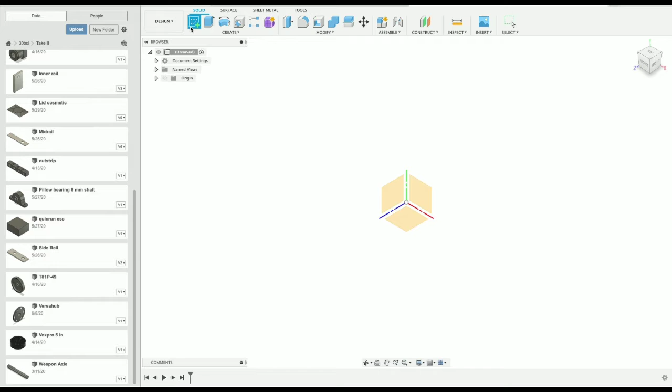Okay, so if you missed the first stream that went on for about 5 minutes, this is not my first stream for today, this is my second. So we're currently CADing a pillow block bearing for the 30-pounder. Here's the 30-pounder CAD, as it was last time. I started up the stream, started CADing this, and then the stream died - apparently someone else was doing a massive Zoom meeting or something. So currently trying to do a pillow block bearing.

So it's 127 millimeters long and 38 millimeters wide. Pop that in there. Okay, so this is about where we got last time before the stream just decided to die.

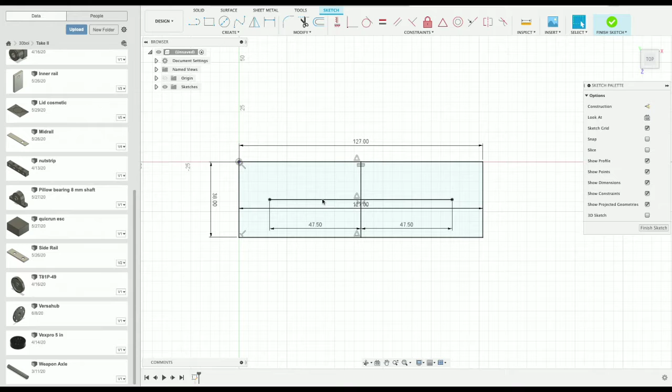Okay, so the holes are N1, which is 19 millimeters in diameter. Okay, that's cool. 19.

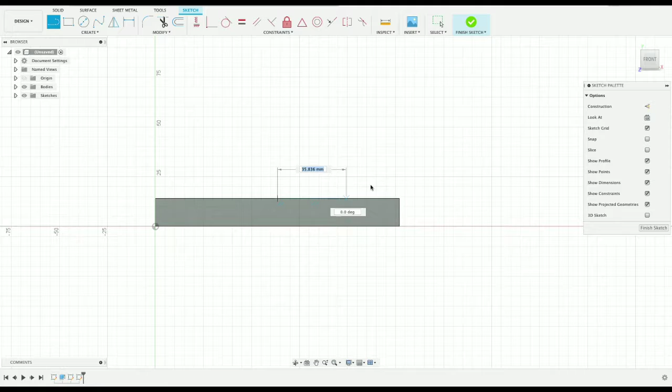It's really, really not helpful. See ya. So it looks like we've got about...

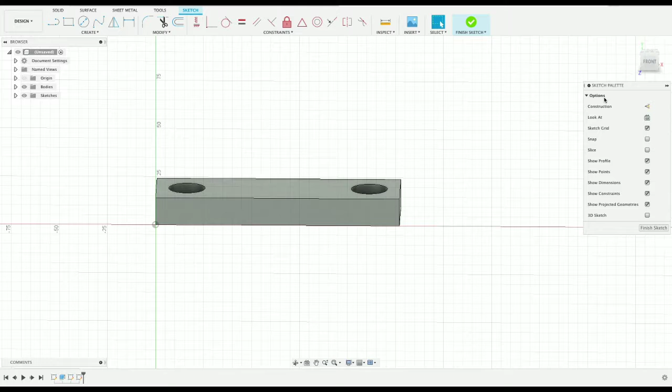So it's a 1/2 inch diameter. And it's... wait, how wide is this? Did I screw this up? 38 - no, I didn't screw it up.

So the question is, how tall is the pillow? Because there's this sort of massive dome shape, right? So the question is, where is that? So I really don't want to just - oh okay, so it's H, so I can figure out how high it is. Where's the middle? H is 30 point, oh my goodness, 1625.

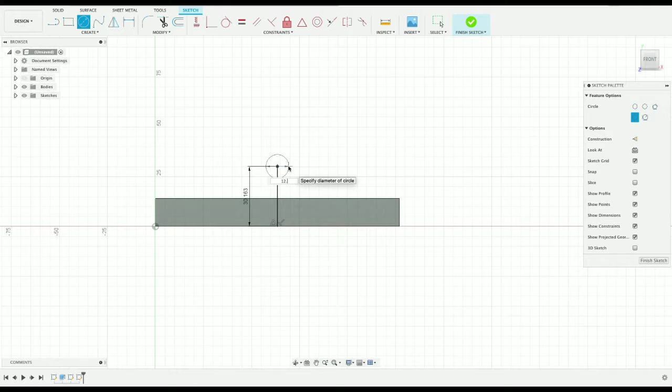30.1625. Okay, so it's a 1/2 inch, so 12.7. Something does not look right with this, and I can't figure out what. So the diameter is 12.7. That actually doesn't look too wrong.

So H0, I don't know, I can't see where H0 is supposed to go. Oh, H0 is the top thing. So it's 62 tall.

Okay, I guess that works. So now we gotta figure out how exactly this thing works.

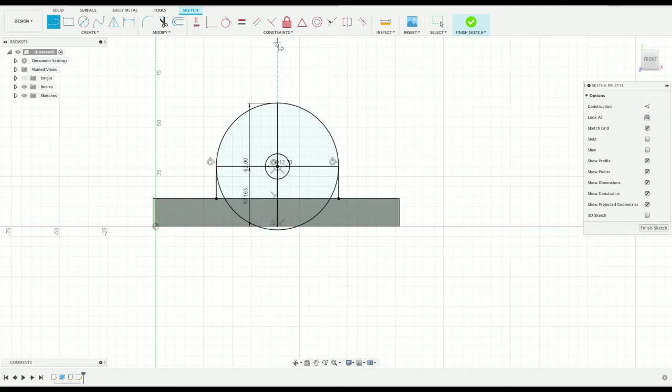I can just create a circle from here to here, and then create these tangent lines straight down. Okay, so now we can trim this sketch. Where's the trim? It's been a while since I've used trim.

What kind of combat robot am I making? I am making a... it's gonna be a lifter.

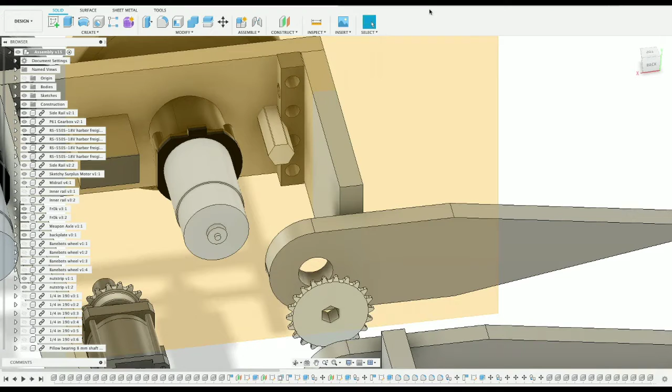Actually, here's the CAD for it so far. We're currently working on the weapon mounting system down here. We're going to be using these, I think they're called Thunder Hex axles. They're basically hex axles, so you don't have to deal with keyways and stuff. They're used, I think, for FIRST and FRC stuff. But you can also machine them on a lathe down to nice sizes, down to circles is what I'm trying to say.

I'm a little bit tired today, so if some stuff sounds kind of dumb, that's why.

Okay, that looks like a really, really small hole. Maybe it's just... I guess that's what it says, right? It says it's a 12... that's a 12.7 millimeter diameter hole. And it's 127. Yeah, this is good.

So we'll call it Pillow Block 12.7. That's what we're gonna do. Okay.

So now, I already did this for an 8mm shaft, but then decided that 8mm was gonna be stupidly small - oh, bumped the mic - so insert that into the current design. I can't make this.

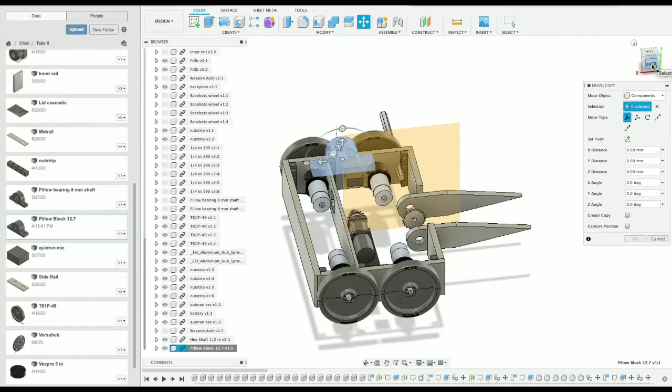Really? No, not yet, no, no. I did something wrong here. Okay, let's just compare this to the side. Yeah, okay, so that is way too big.

So the question is, what am I actually able to... why can't I show or hide? Oh, I guess I can pop down here. I don't know.

So how tall is this? 120... oh, it's 76mm. Okay, well, it looks like I'm going to need to find a different pillow block bearing, because this is 100... yeah, okay, so, yeah, it feels like this doesn't need to be this big.

Might have to just make my own. That's not exactly ideal, but at this point... stream's audio...

Hell, audio... what? Really?

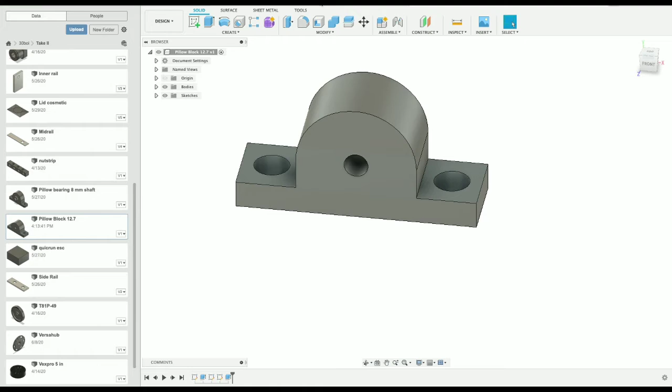Okay. And my computer's at very, very, very low battery. That's not good. Okay, we're at 2%. We almost just killed the computer. Okay, it's still working, that's good to know.

YouTube was trying to tell me that I have an audio stream bitrate of 0, which, yeah, so that's good to know.

Okay, so well, I guess let's just try and do everything else but the pillow block bearings. I'll have to just look for that, look for one that fits the description.

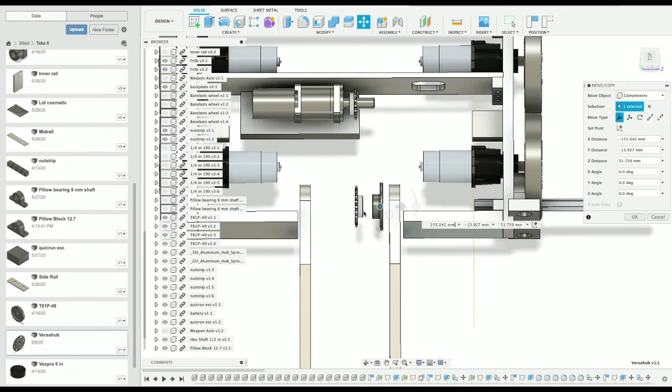I don't really know how I managed to find one that was so big and why I didn't actually check it against the size of the robot, but that's cool. Okay, we'll get rid of the pillow block bearing in a second after we put this into position. Okay, looks like it's going to be a little bit big.

But this is basically what I want. Looks like it needs to go a little bit. Yeah, there we go. I might reshape those ends. This is a featherweight? Yep, it is a featherweight. Aiming for sportsman class, just because...

Are those... oh, that's fun. The sprocket and the other thing are different sizes. So I need to see exactly which size I'm going to go with.

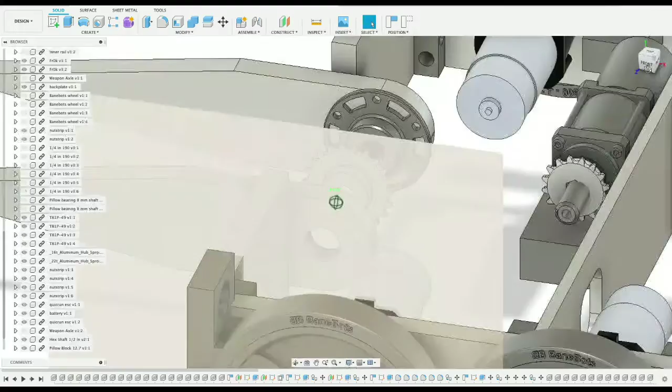Make a video comparing the best CAD software specifically for robotics - that is an option. The problem is that I have to learn all of those. I have Creo installed on my computer, both versions, for university, but from what I've done, Fusion is the best. Maybe it's not the best, but it took me 15 minutes to figure out how to pivot and rotate around an object, whereas in Creo you have to middle click, you physically have to have a mouse. So I had to go buy a wireless mouse, which kind of sucks.

But we're trying to look for the hubs. Number 25 sprockets. Oh no, did I order the wrong things? Cause I already ordered some of these parts. Huh.

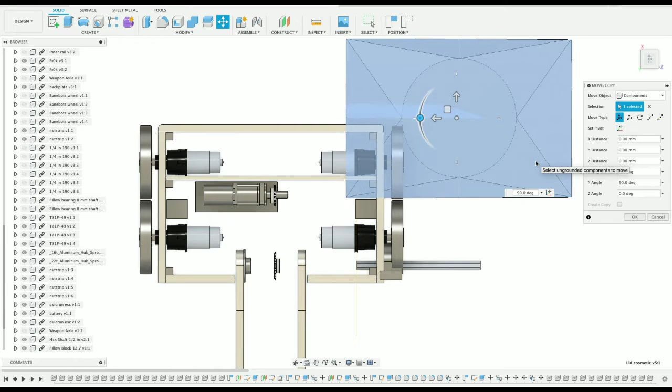Okay, well I figured that out. We can at least pop the lid on to see how that would fit. So the last real stream that actually worked - this stream's probably the best one that I've done since the second one, so okay.

Oh yeah, oh boy, that's gonna look really, really nice. So if you've missed the last couple streams, this has been an ongoing project since, oh boy, it's been a good long while.

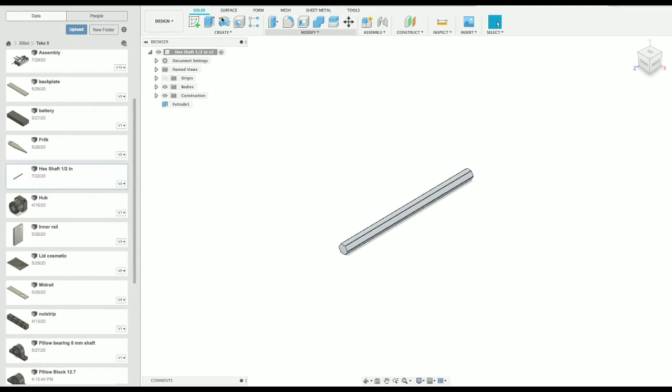Yeah, that looks good. I wonder if that plane is from the axle. Let's pop this open and see. Yep, there it is, that's why I couldn't show or hide it. There we go, we'll save that. Pop back over to the assembly, and we can get the latest, and that'll make that annoying plane go away.

Couldn't - it says I couldn't download it. That's cool, well whatever. So that's roughly what it's going to look like when all is said and done.

Oh boy, is it broken? What is it, can I? Okay, we can get rid of the pillow block. Well, we should actually probably just get rid of the pillow block. Delete it. So there's the Versahub.

Come on. Come on, Fusion. Sometimes Fusion's annoying, but it is pretty good from all things considered.

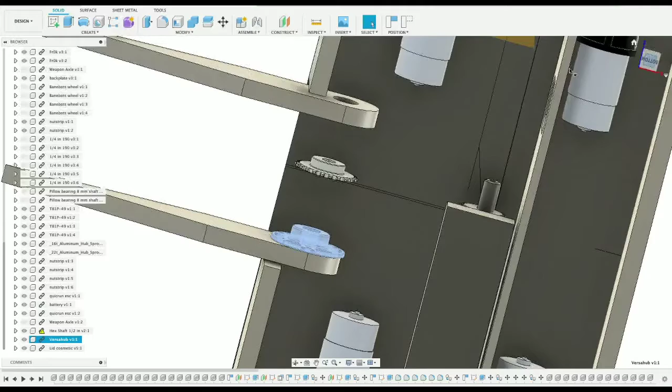So, whoa, what just happened? I assume most people that are watching this stream are here because of Vex. So.

Okay, now it's gonna let me move it. That's nice, let's pop that in. That's about roughly what we're gonna stick with for right now.

Okay, so this sprocket is just too small. Yeah, the sprocket's just too small.

You also captain an FRC team? Nice. I wanted to do FRC, just never really got the chance. It was kind of one of those - the one year that it was really an option, that was the last year it was Tower Takeover, and I was busy trying to get a robot that would actually work. So that kind of had to pass on that.

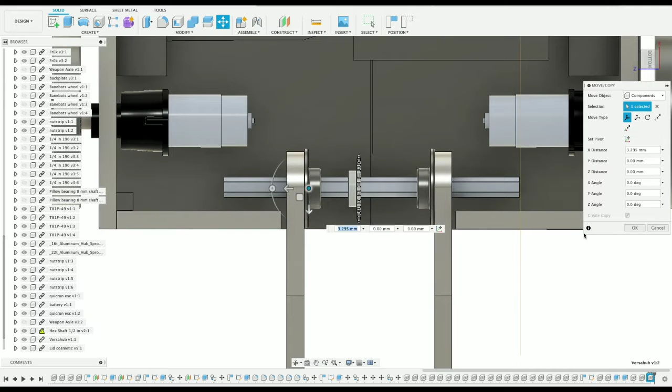I actually have a surprising number of parts for this robot already. I bought all the drill motors last summer, so I've had the drill motors sitting in - I can see them, they're sitting in my closet in a USPS box right now, just chilling.

Okay, so what is left? So we've really got to figure out how we're gonna attach this. I want to keep it relatively...

Okay, let's save this, let's try and get all now. So I really want to try and keep this as clean as possible. Okay, it worked, that's good. Because I really like the sort of clean design.

I tried to like fillet it, but I think at this point it might just be a better idea to try and kind of clean it - maybe just try and sand it down.

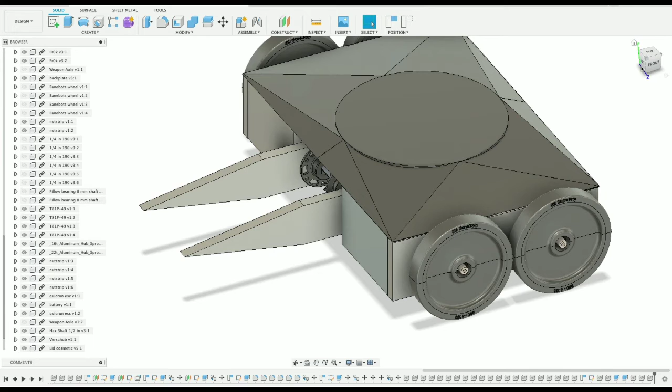I have an upcoming project that I've been kind of teasing on Instagram a little bit, that's a lot of 3D printing, and it's all sanded and painted. I'm waiting on some LEDs to arrive because I broke an LED ring. But you can get some really, really crazy good results if you just chill, or if you just spend some time sanding and stuff.

Okay, so I think I'm gonna get rid of these corners and not fillet those. So...

I can't remember if this nut strip is actual nut strip or if it's FingerTech nut strip, because there's a pretty good chance that I will just be buying FingerTech nut strip at this point, since there's already going to be a bunch of semi-difficult machining with these gigantic holes in the aluminum. Speaking of gigantic holes in aluminum, that's probably what we should focus on next.

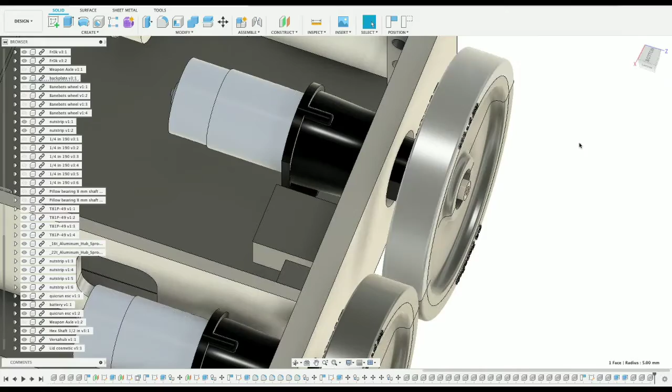So we need to - goodness, Fusion, chill. You don't need to go that fast. Okay.

Okay, so what I'm thinking is basically a little 3D printed bracket that kind of sits over here and is just connected with standoffs to here. So it kind of pushes - I'm trying to use hand gestures for this - it kind of pushes this rim flush to this wall and then sticks in there. Still trying to use hand gestures, it's kind of frustrating, honestly.

So let's try and CAD that. It looks like it's, oh that's... So what I might do is - yep, it went crazy.

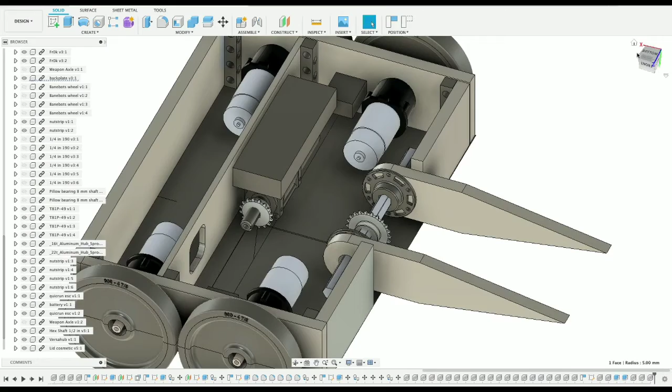Okay. So I got this. Select all these bodies.

Oh my goodness. Then we're going to move these. Okay, so we deselected that. Yeah, that's looking better. And it'll probably end up providing a bit more support.

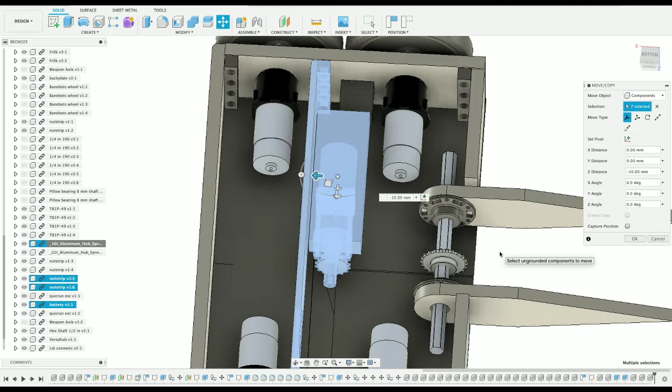I should get a face cam for streams. I can, or I really should. It's all in OBS, but the problem is I don't have a webcam for my desktop because I'm using the desktop to stream it. When I was looking for a webcam for this, it was right at the beginning of quarantine, so everything was super expensive, and I wasn't about to drop 80 bucks on a webcam. Then once the internet problems started happening, I wasn't about to drop 80 bucks on a webcam when I wasn't sure if I'd be able to keep streaming. Ideally, I'd be able to just load up a capture card or a second capture card, and use the DSLR or something, but that seems like it'd be pretty not fun to pay for.

Oh my goodness. Okay, so let's get the diameter of this, and we'll start a new sketch. Inspect. 18.669 millimeters. Round that up to 19 because you got some shrinkage, I don't know. Printed holes are usually a little bit smaller than you modeled them.

So, start a new thing. So 19 millimeters. Is that radius or is that diameter? I have a hunch that might be radius because that, yep, that's radius. Okay.

37.5. Well, we're just gonna go with 38. It's more about the compression on the other side. 38. Okay. So, 2 in, yeah, okay, so 1.5 inches.

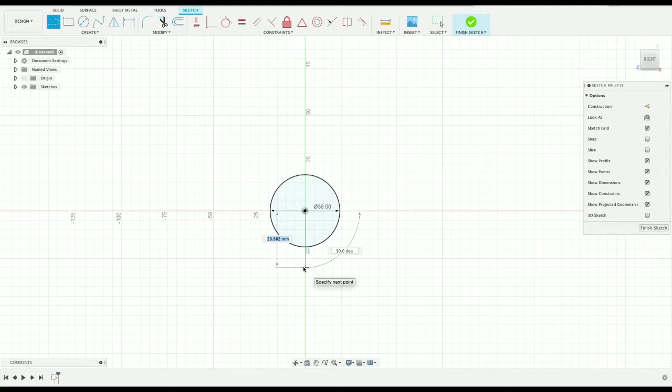I guess we're just gonna make it a square, because then that'll be, yeah. Okay. I like half an inch for this. That feels like a proper amount. Yeah. Okay.

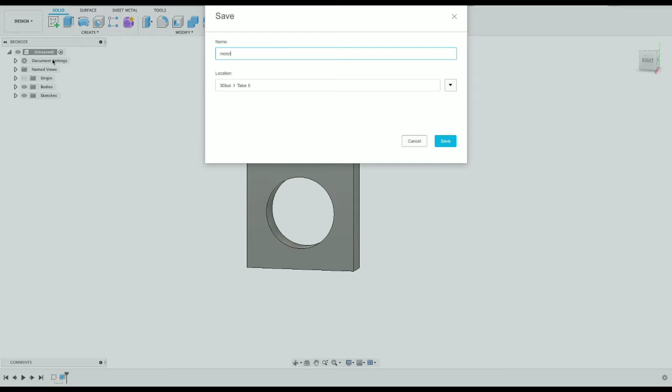I could probably be more efficient at modeling if I did this all in one pass instead of two. But 15. Nope, not a circle. Sometimes these. Is this just looping the same song over and over again? Yep, I'm pretty sure it's just been looping this. Yeah. Okay, there we go. Fixed it.

What did I do wrong? Okay, we're just going to redo this entire thing. 8. 8. Okay, so the question is, what size screws am I going to do for this?

Oh, okay, so here's what we're gonna do. I'm gonna set these for 8. Nope, that is not what I wanted. Set these for 8, basically just creating points there, and then I'm gonna go in with the hole tool. That'll let me basically come back in and change the diameter very easily. I'm not gonna have to change too much stuff.

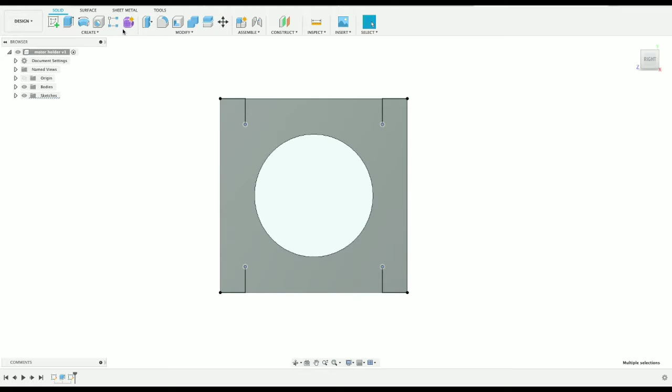I'll just edit the whole print. Nope, I need a line, not a... Okay, so we finish the sketch, then we select all of these, do the hole, not a 22. Sure, we'll go with 10 millimeters. Actually, no, we're gonna go with 8. That feels right.

Okay. That looks really, really nice. I'm really, really happy with that. Okay. Okay, so let's save that.

Gonna need to figure out what kind of screws I'm gonna use. Actually, do I still have screws saved inside of this file? Go back to the main folder. At 10/32 screws. Okay.

I don't think we're gonna use countersunk screws for this, because it's not like we need the smooth finish to prevent it from getting caught on something, but this is what I have at hand. So, do I feel like that's gonna survive, or do I have anything bigger? Ooh, I have some 4 inch standoffs in here that we could just trim down.

I should really just render that. That'd be fun to see a render of. It's an absolute trash design, but it'd be fun. Do I ever stream on Twitch?

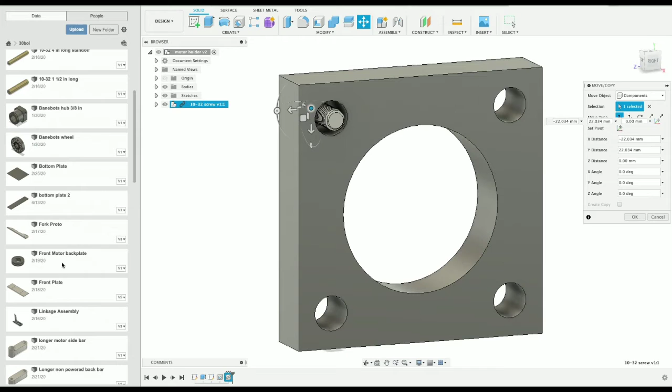Oh, here's an older version of the backplate, which I was using for the older design, where it would just be like a zip tie thing. It was a horrible idea. I don't know why I ever thought it was good.

Yep. I don't know why I don't have any 1/4 inch screws. Maybe they're hiding in some other folder or something. I don't know. There's the drill motor.

Just Command Z that out of there. We'll save it. Can pop into take 2. And then we'll chuck these in there. Nope, did not want to do that.

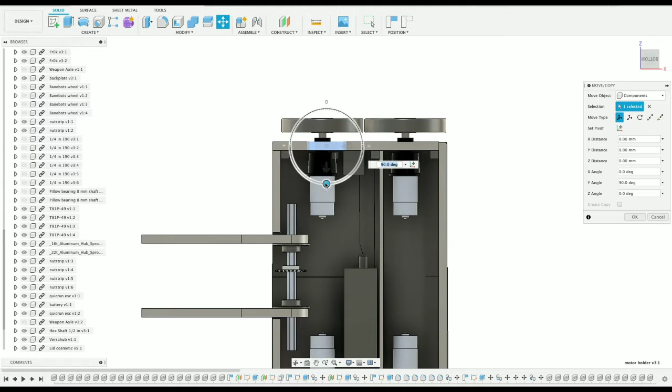Going back to Twitch, I do really like streaming on Twitch. Mostly I've tried streaming some video games, speedruns and stuff, but there's always robots to build, so it's always pretty fun doing robot builds and stuff, so I'm usually doing that.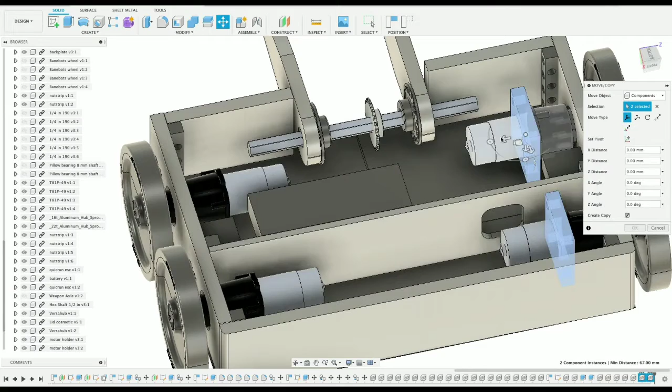It's really, really amazing to me that the stream hasn't died yet, just because, my goodness.

So then I need to... oh, the side panel should be the same file, so I can just go in and do the same thing. Backplate - let's actually pop into the backplate and get rid of these. Fillet, suppress features, save. It's literally just a brick. That's fun.

Inner rail - these aren't used anymore because we're using pillow block bearings. Mid rail, side rail. Let's pop that open.

Nope, I wanted a line. That was the problem. Nope, not 6-60. Okay, we'll get rid of these extra lines.

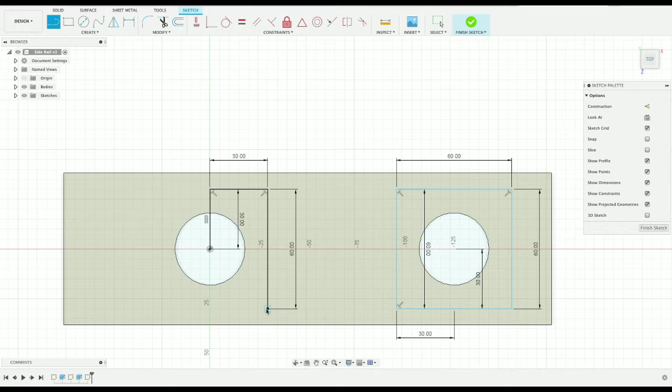Okay, so now I just need to...

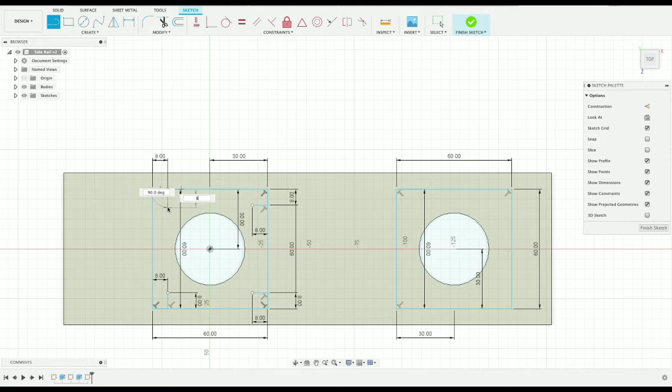Okay, one of them's done. Gotta do the other one.

I'm trying to decide whether or not I want to go with 1/4-inch screws or 10/32 screws. I think 10/32 screws could be pretty great. Well, that's debatable - they could be cool.

Okay, that's all of them. Let's finish that sketch. No, because I need to go - let's see, what is it? It's with 10, I went with 8.

Okay, so when you're holding down Command or Control, yeah, there we go. Goodness, okay, that looks really great. So let's save that and go back to the assembly.

Yeah, we need to get all latest. So, couldn't - okay, saving and then trying worked well last time, so here's hoping that it works well this time. Looks like it's gonna work. Oh yeah, it worked, okay.

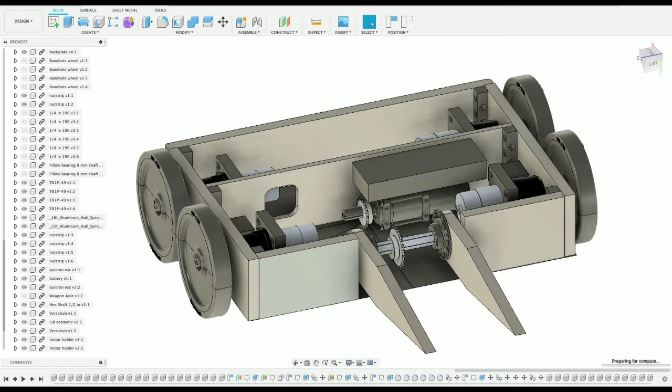Goodness, okay. So, let's capture position.

Okay, so I kind of really want to use the big Vex Pro wheels, but they're like $30 a pop or something ridiculous like that. They're like 5 inches, because that'd be really fun to get really massive wheels.

So, okay, so let's select these. We're just gonna push them in a little bit farther towards the wall to try and line up. Okay, that's too far.

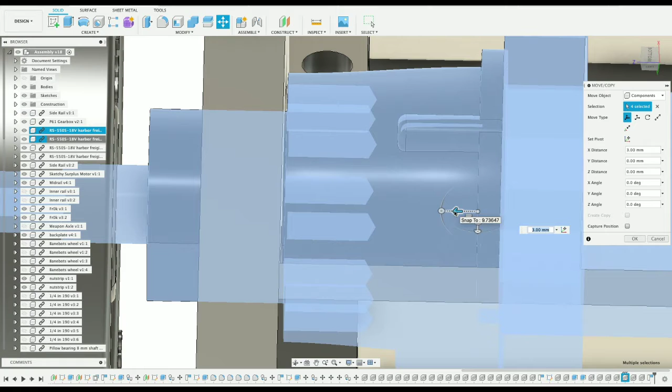The interesting thing about this bot is I have no clue when I'm ever gonna get to compete with this thing, because the closest 30-pounder competition is either Motorama or Florida, I don't know which one's closer. On the plus side, it should fit in a suitcase, so maybe once everything gets back to some semblance of normal...

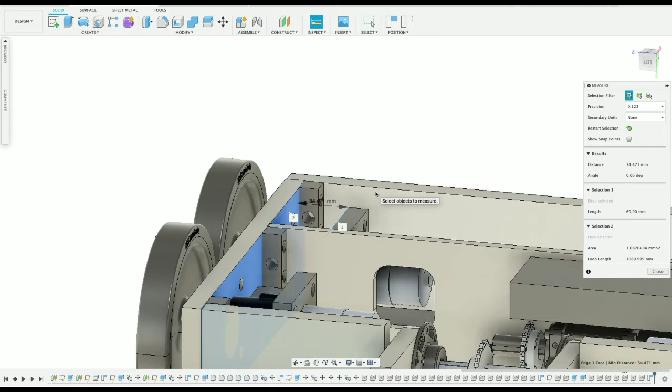No, okay, yeah, you did what I asked, but not what I was thinking. 34.471 - what is that in? Nope. It's 1.3 inches, so it's not exactly a clean break, but...

Oh, I could just make my own standoffs that are the right length. That's a perfectly valid thing. I have a lathe, so it shouldn't actually be that bad. I just need to figure out what screw diameter I'm gonna do, and then...

Yeah, okay, so I also need to figure out what I'm gonna do for a switch, because you need a power switch - you're mandated to have a power switch. So the question is, what should I do? There are Whyachi switches, which are expensive. How much are Whyachi switches? The cheap one is $70, the expensive one is $97.

Okay, another option is a FingerTech switch, which is tiny, but the website was kind of saying it sounds like - it says 40 amps. The question is what all this will draw. I'm probably going to run it on 2 or 3S because I don't feel like buying expensive 6S cells. Oh, that's weird, the first result is not FingerTech's own website. Oh, it is, yeah, I'm going crazy. What does it say?

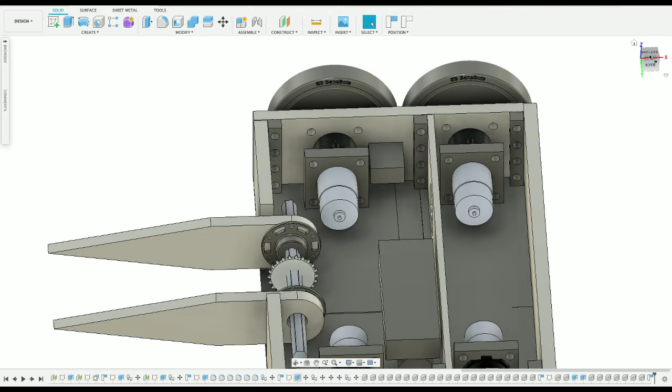Don't use a link. Yeah, I know, but for most of my robots I like to have some sort of challenge with it. Like with Blastwave, it's keep the chassis made out of PLA. And with StompBot, it's see what's the best 2-wheel drive wedge you can do while making it out of a guitar pedal. With this one, I was trying to do a budget constraint thing, because you see some of these robots and it's like, okay, with the machining costs and stuff, like a full billet frame, you can easily spend a few grand on a 30 pounder. And I'm like, well, what if I could just do it for $300 with drill motors and stuff, kind of a throwback to the older days.

So that's kind of what I'm thinking. The whole thing is making it out of aluminum plates that I can get really cheaply. So I think they're still good, I haven't actually looked in probably 4 or 5 months because I've been trying to get the CAD finished before I bought any of the actual aluminum.

But yeah, might see. Currently it's looking like I'm either going to try and custom make a switch, or we're going to see if a FingerTech switch will work. Maybe 2 FingerTech. Well, no, because then I'd have to have 2 batteries. I don't know, I don't really know.

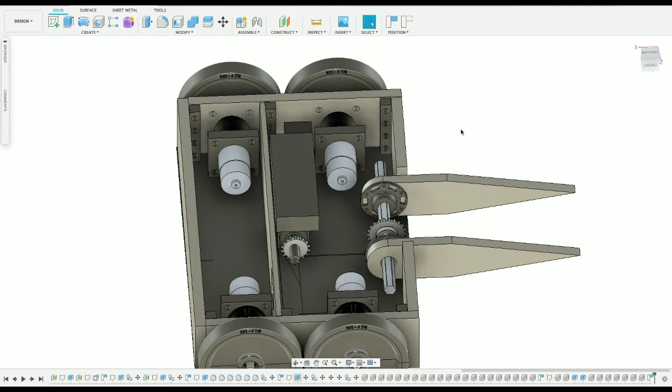Okay, so what's next? My goodness. So I'm gonna, well, yeah, we'll wait on that. But now we finally have this sort of figured out, so we've got to figure out a couple things.

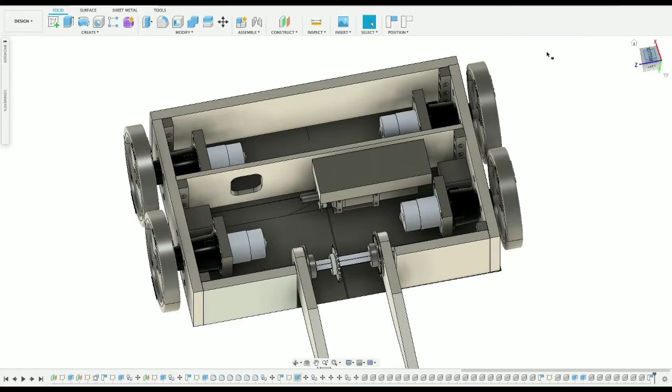We could just, aluminum is really cheap right now. Yeah, I might have to pick some up. I've been trying to save money, but at the same point it's also, oh boy, okay, nope, that just got grayed out. But at the same point, if I'm gonna eventually buy it, then it kind of makes sense to buy it right now if I can save on it.

Ooh, we also got to figure out the hubs. So what are we gonna do for wheel hubs? Is this Banebots? Banebots. What are Banebots hubs like? That's the one thing that I haven't actually figured out.

I think there's a T81. Yeah. Sounds like I can get it with different shaft sizes, all the way up from 3 millimeters. Who would use... you could drive one of these wheels with an N20. They sell hubs for that.

Those little tiny ant weight wheels, which are what Blastwave runs on, and also the upcoming Fairyweight, which I'm waiting on new speed controllers to arrive from the UK for. So stay tuned, I guess, if you want to see that.

But yeah, goodness, okay. So we got to figure out a couple things. So where would the switch go? Furthermore, what is going to go in the back here? Is this thing going to be mostly hollow? There was something that was going to go back there.

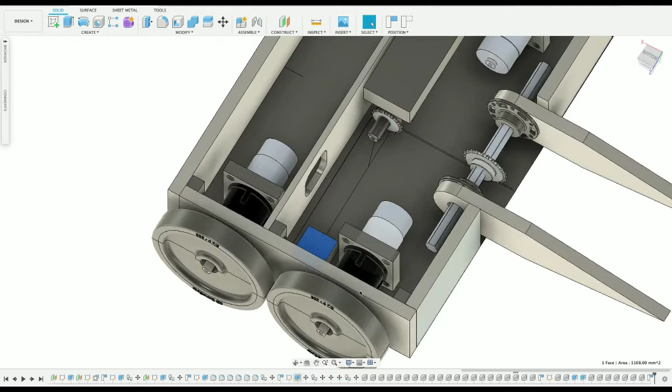So, here's the speed controllers. I don't remember, I need to do some calculations and see if I can do it with 2 or if I should do it with 4. Because I could do 2 ESCs, or 1 ESC per side, which is what I did with Blastwave, and that worked. There were bigger problems with Blastwave, with motors just not working, and also having a really terrible lid mounting system.

Fairyweight is 150 grams, so it's the ant weight class in the UK basically, it's really small. It's mostly wedges, there's a few spinners and stuff. I have some designs, I have one that's fully designed and almost completely built, just waiting on some electronics. And then I have another one that's basically finished in CAD, so that should be fun.

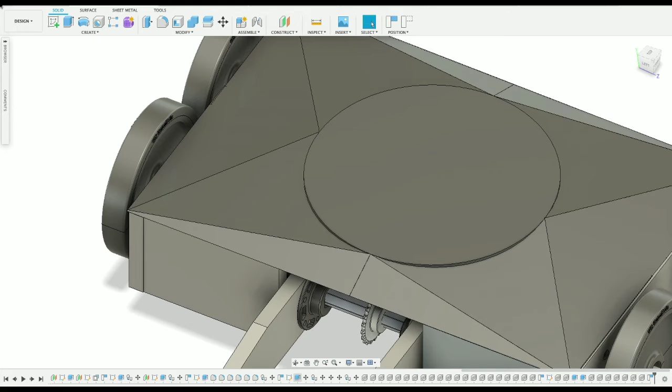But yeah, okay. So I kind of want to figure out an LED situation up here. So let's actually just pop that open. I can close all of these things. Okay, so let's pop the lid open.

Lid cosmetic, I don't know. Oh, that's right, because I was gonna fill it with TI, or put TI plates under it or something. So the goal is to actually make it look like the Sega Dreamcast.

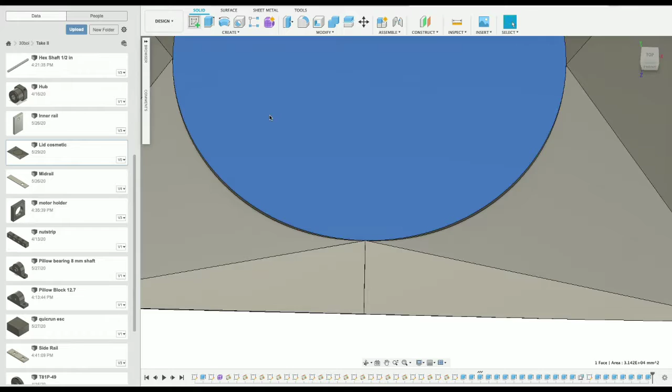There's a very distinctive triangular sort of jewel key thing that we're going to try and emulate. I might actually print it. Okay, let me see if I can print it. Nope, not 13.

Okay, so I want this to be an equilateral triangle, or roughly equilateral, I don't know, just can't be super crazy. Isosceles would look good. Let's go with 8 millimeters, seems to be kind of the theme for the bot. Yeah, that looks good, and I can always make it bigger if I want to.

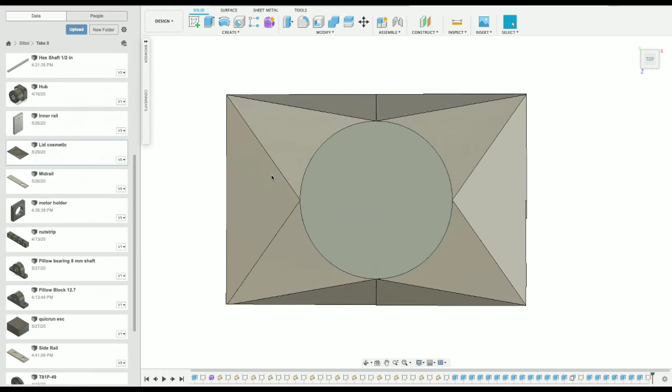Okay, so that's where the LED is going to go. We can... you know what, I'm actually going to have to play around with that a bit more, but that's kind of what I'm thinking for this right now. Yeah, there's some weird stuff around the edges because this was a nightmare to make. This took probably like 2.5 hours or something ridiculous.

Okay, so what else do we got to do? What else do we have to do? Goodness, English, I gotta English. So we figured out how we're going to mount the motors. Didn't I make a to-do list on my weights thing? That's right. So I might try and pocket out these front rails and maybe even

this back rail to save weight. However, that does weaken it. And also, however, that seems like it would not be fun without a CNC machine. So I also don't really like these forks, so we got to figure out what we're going to do with these forks.

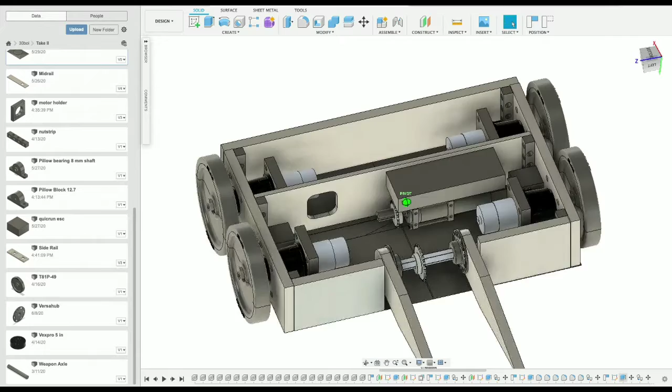So, should I work on the forks next, or should I work on figuring out how to mount this lid? Brain is immediately jumping to magnets, which is a horrible option. I guess that... I kind of want vents on the side of this. That'd be so dumb, but that'd be cool, have like some sort of vents.

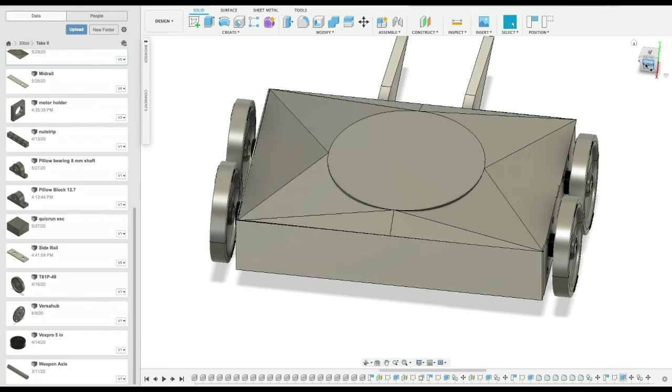Also, I don't entirely know what I'm going to do about the middle here. I might put standoffs between here to protect the chain, which actually wouldn't be a bad option and would serve to further make this more rigid.

Yeah, I wonder if there's anywhere I could go, like any stores that would have pillow block bearings. I know like Tractor Supply has massive shaft collars for tractors and stuff, but I wonder if anywhere would have that. You know what? Screw it, let's just make these things.

I'm gonna use the whole thing so I can change it later, depending on what size. 38.281. Oh wait, no, we can't use that one, that one's too far. Inspect. 34.5, so we're just going to round up to 5. If there's half a millimeter of extra, that'll be fine.

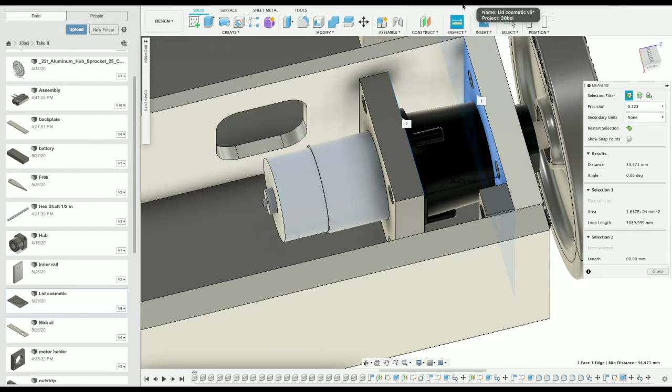Okay, let's get rid of that, let's just create a sketch. No, we can do it on the side. So, okay, that's what the interior diameter is going to be, so we're just going to stick with 8 for right now. You know what, no, that actually makes no sense to do right now. Don't save, get out of here. Okay.

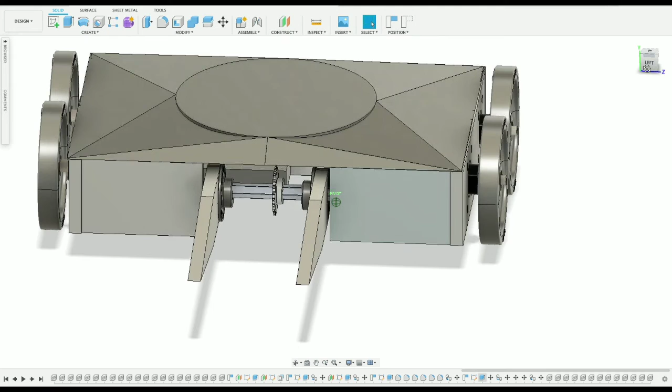So, we got to figure out how to mount the lid. So we have a couple options. We can either... count. Okay, where's the lid? Lid cosmetic, there we go. So we can either use the titanium underplate, use the titanium plate underneath it as the actual lid, and then have screws that hold it in.

But then you see, this is the problem with aesthetics. That's the question, like what exactly do we want to do? Also, this is going to be a nightmare to drill right here to try and get these holes the right way. But that actually isn't looking too bad right now.

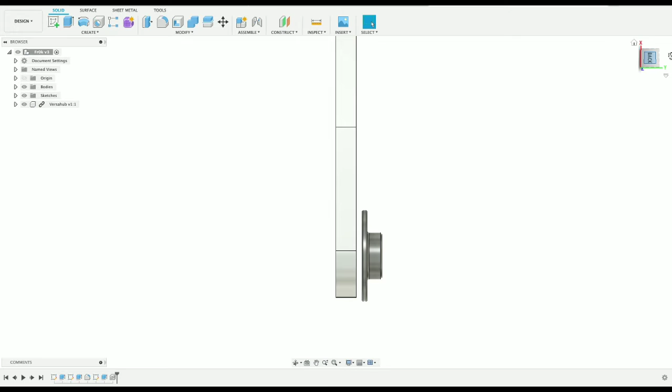While we think about that, let's work on something that we can actually get some work done on, because I've been streaming for a very long time. Not as long as some professionals, but oh my goodness, my voice gets absolutely wrecked. Even after recording, it usually takes me between 5 and 12 minutes, depending on how long the script is, to record a new Kepler video. And oh my goodness, my voice is usually shredded after that. I've tried to record videos back to back before, and they almost always turn out just absolutely horrible.

Can I move that to the front? Yep, I can, okay, so we can edit this sketch. Okay, I want to say I actually did this in class, that's how long I've been working on this. No, that might have been the first version of it actually, now that I think about it.

Okay. Generally, I'm CADing pretty messily when I know that I'm going to be trimming stuff later. So that's fine. Because, well, actually, that part bugs me.

Okay, so let's do some trimming. Nope, wrong one. Trim. Okay, so now it's bigger. What?

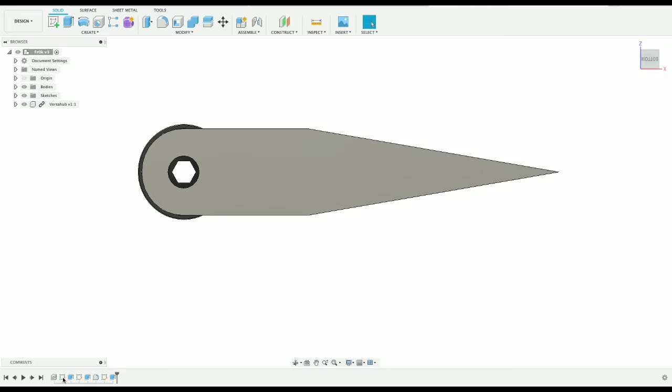Okay, fine. Let me go back in and edit that sketch. I forgot to get rid of the lines, so it ended up being exactly the same. Okay, there we go. Delete, I can just delete that feature. Okay, so where did it break?

You know what? No, this is dumb. We're just gonna make a brand new one. Okay, so we'll finish the sketch. Going to go back, finish the sketch. Okay, so that broke that. But if we roll the history marker here, I straight up don't know what's going on.

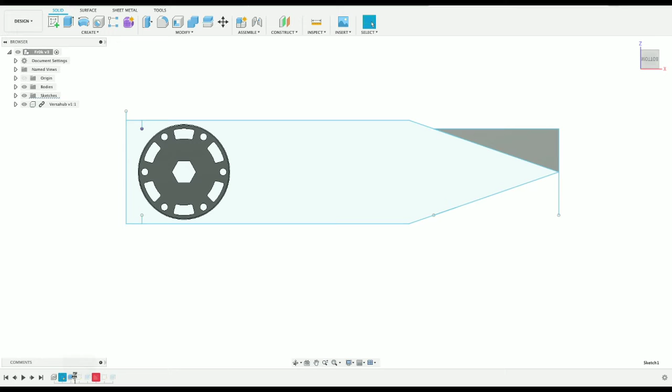You know what? No, this is dumb. Don't save, we're just gonna make a brand new one. Okay. Can't just drag it in there. That kind of sucks. Fork version 3.

Okay, let's create a new sketch. 54. No, let's actually make it a little bit bigger because I want the... Goodness. 60. 60 looks good. Okay, I'm liking that. Okay, so from here...

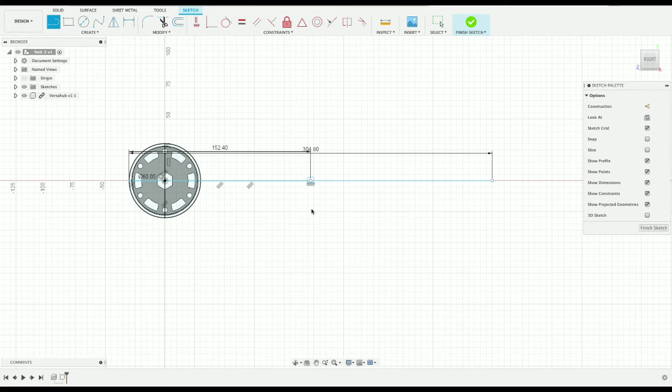Go to 12 inches. We'll just do that. 6 inches. Nope, not 6 inches. With 5 inches, because there's something like an inch on the back. No. So we're going to 6 inches. So halfway down. Yep, yep. Okay. Liking this.

I don't know why it made me do it that way, but that's what it did. Okay. So I can now go trim that, get rid of that.

I really want to add some sort of barbs to this, but I can't figure out how, okay, so I gotta have that. And I want to still be able to set it down and have it rest on that point. So I don't know how to do it. That's the thing. Also, I don't feel confident enough in my machining abilities to be able to do much more than this.

I might need to go look at fork robots. I'm trying, I can't think of another robot that looks like this. That's the other interesting thing about this whole design.

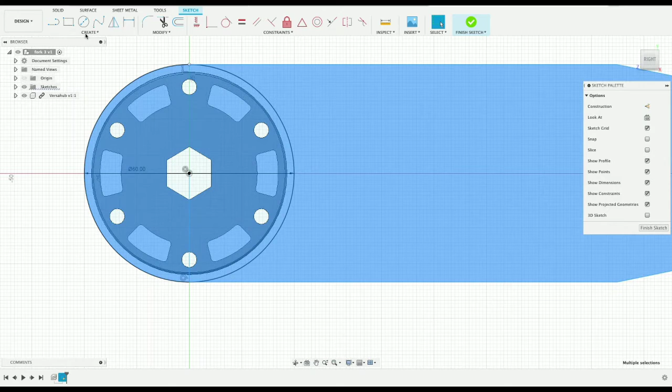Okay, so, sure, that's cool, we just... Okay, that's actually awesome, that was surprisingly awesome. Okay, I'm not going to be able to cut this, so let's just do this, and we'll do...

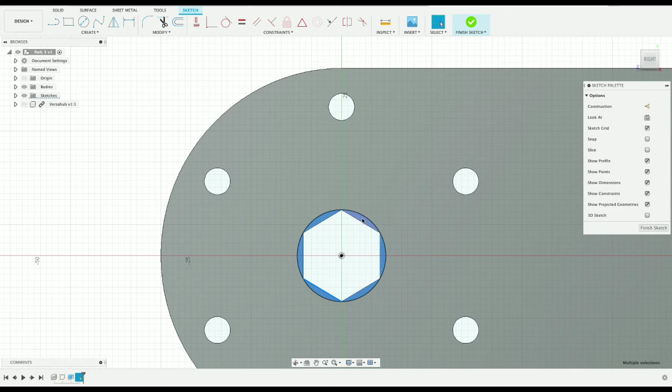I might actually put one on each side. Okay, fine. So let me do that. Yep, there we go. Okay, that looks good, that looks really good.

So we'll save that. We could insert it now, it really doesn't matter at this point. Man, like, what is there to do? What else is there to do? It's super, super, super strange.

Like, so I gotta figure out what size screws I'm gonna use for this. I guess I gotta look into shear strength and stuff, because if these are getting broken, so would I rather it be the screws that break?

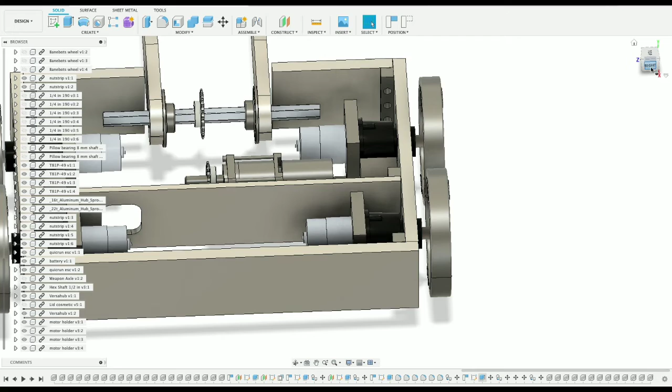So let's just brain this out for a second. If I took a direct hit to the wheel, the first thing to break would be this shaft. So aside from, yeah, like if I had a flipper get under the wheel and it just hits that wheel, oh okay, that's also not good. We need to change that, fix that.

I guess I could do a sort of nice back plate, like a cosmetic style thing on top. Okay, so if we have a flamethrower—no, that's not the right word—a flipper, if we have a flipper get under. My goodness. If we have a flipper get underneath this wheel, then what happens? It's gonna break this plastic shaft first.

So it actually doesn't matter that much what screws we have here, because I could save weight and space and just use like 10-24. 10-24 feels appropriate for that size thing. It's not too crazy, it's not too little. Yeah, I think that's actually what we're gonna go with. So...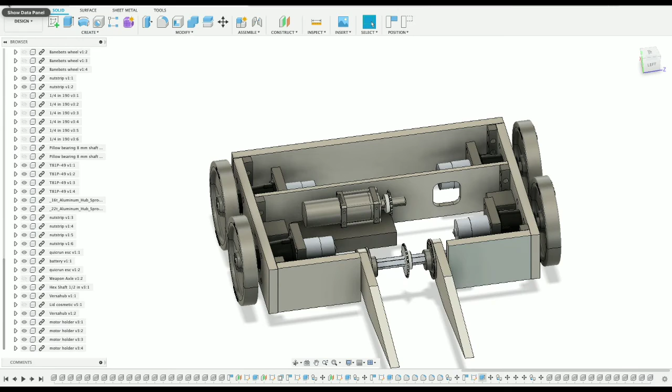Where are my 10-32 screws? I think this is what we're gonna do. We're gonna model those sprockets—isn't the right word. Okay, what is it? No, give it. Okay.

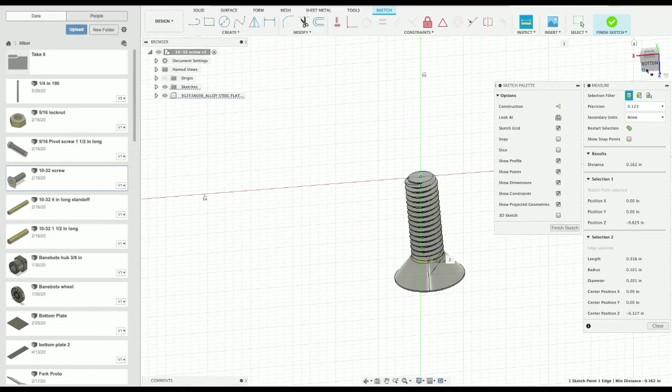Okay, so here's what we're gonna do. We're just gonna do this circle thing. 204, then we'll inspect it, then we can see them both.

Diameter is 5.1. So we'll go with like 5.2. Yeah, that works. Okay, great sketch. Bam, bam. Nope. 5.2. Then we'll go with, we could actually go with 8 and it'd be.

The question is, what size? I could turn the aluminum down to whatever size I want. That's kind of where we're at. But that's an extra step that I don't want to have to do. So it's not a 1/4 inch because a 1/4 inch should be 6 and change.

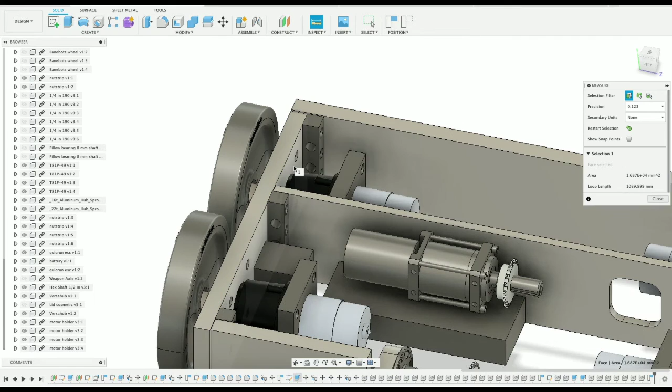38.2. So, wait, oh, that's actually got a massive gap in it. Is it this one that I... Okay, so okay. 34.4, so 35.

Extrude 35. So this isn't going to be hollow all the way through, but this is a pretty good representation of what it is. It'll probably be aluminum, but I don't really see a problem with that. Get out of here.

Oh shoot, okay, so we need to jump back up into take 2 so I can save this in the proper place. Motor retention standoff. Goodness, I suck at typing. Wait, is that actually the third fork? I think it's the third fork if you count this in. Wait, yeah, fork proto. This is what... Yeah, okay, I don't know.

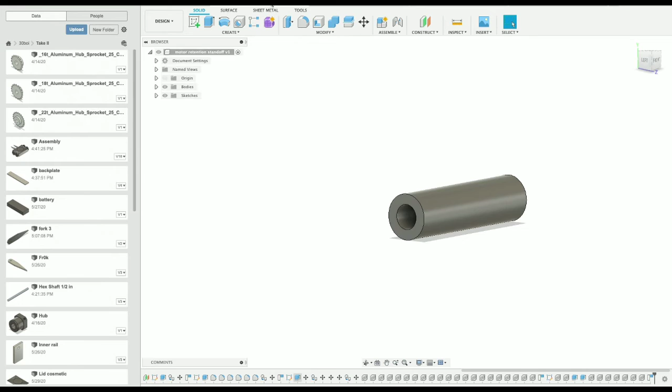Sometimes Mac OS's full screen stuff is just really, really annoying. Wait, did I not actually save this? Motor retention standoff. Nope, I did save it. There we go. Okay, I think we're going to do this and then we're going to call it a day.

I might try streaming again tomorrow or something. This was really fun. I'm really, really glad I could finally start chewing away at this, because this took way too long to get going.

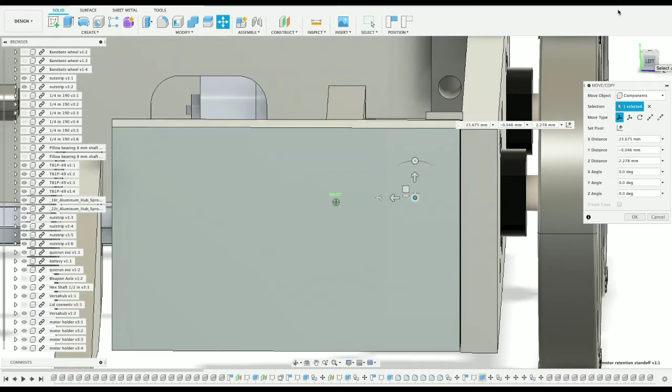Our internet was terrible, and the cable guy was like, yeah man, it's that tree branch that's causing all of your internet problems. So we got the guy to cut down the tree, waited like 3 weeks for him to show up, and then finally cut down the tree, and our internet's not any faster. It was so... well, I only really found that out after I tried streaming.

For whatever reason, my desktop was just absolutely horrible. Like, it would not connect at all. So I upgraded my Wi-Fi card.

Oh wait, hold on, this menu. Let's get this out of here. Where did it go? Okay, I think I can just redo my way back there, right? I think so. Yeah, I can, okay, that's good.

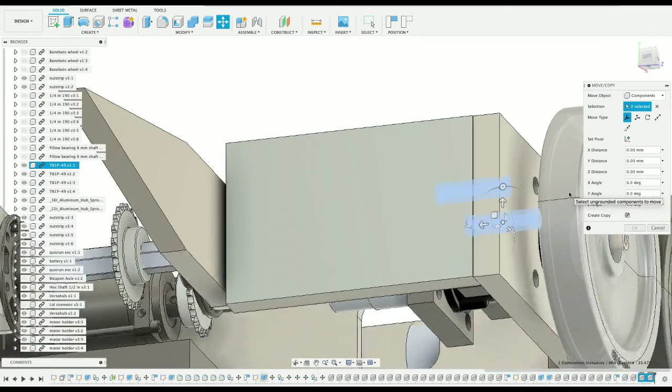So I ended up upgrading my Wi-Fi card, which helped with reliability, but not with speeds. Well, it sort of helped with reliability. It helped enough that I knew it was better than the old Wi-Fi card, but it didn't help enough to actually be able to stream or anything.

So that's when somehow it was decided that we were gonna move the Wi-Fi router into my workspace, and the Ethernet cable wasn't long enough to keep it under my desk, so now it's sitting on the opposite side of my desk next to the Wi-Fi router, and we're using some weird DirecTV coax cable thing that lets you convert Ethernet into coax and then back to Ethernet. I don't know how it works, but I've been able to keep a pretty straight stream the whole way.

I mean, after that dumb Zoom call thing for last time I tried, but we're back at it.

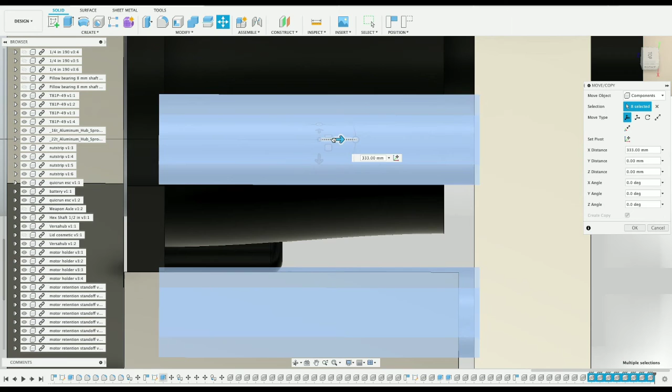Okay, so let's match this with the wall. So I'll move these into position. Okay, where to go? There we go. That's it.

Might countersink these holes and use flatheads just for... but then again, it really doesn't matter. Like, I could use cap head screws. It would be lighter if I used non-cap head screws, or it'd be lighter if I used countersunk screws, because you're getting rid of some of the aluminum, minimizing the size of the head.

So it really all comes down to how tight the weight limit is, or how tight on weight this thing's going to be. Although if my spreadsheet is anything to go off of, where is it? Where's my weights thing?

It says I'm at 9,295 grams, but that's not counting any of the electronics, the pillow bearings, the sprockets, or the chain. But there is a lot of weight that I could save by getting rid of some stuff.

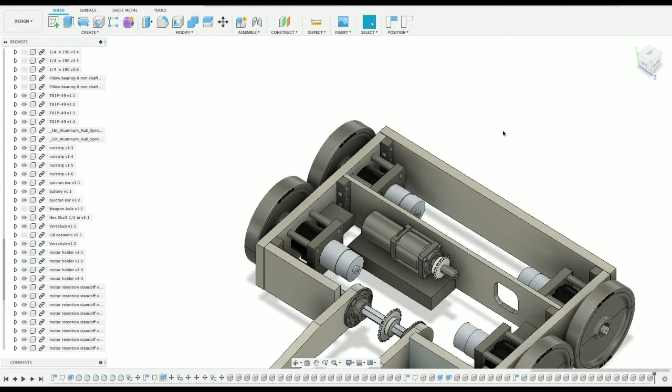By pocketing out this back panel - like this does not need to be a half inch. In fact, if I switch this to whatever thickness this other piece is, that'd be actually pretty great, because then I wouldn't have to worry about getting beached on my back.

So I might do that, because that would literally cut this in half, and it is already 1,000 grams. It's 2 pounds. This piece is literally 2 pounds. It is 1/15 of the weight limit.

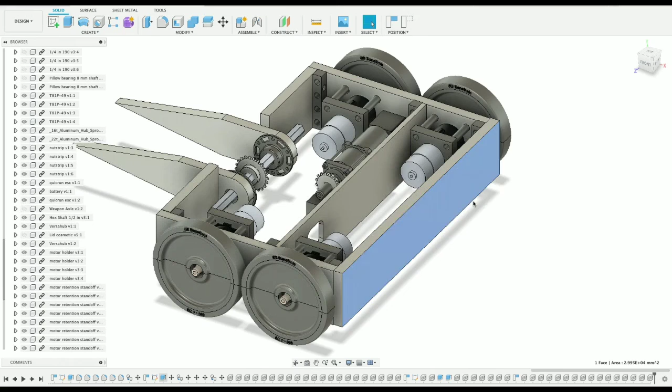So I'm really liking the idea of trimming that down, because I could literally get rid of this and it would be nothing, right? It's not like this front rail, which is going to be supporting the motor or the weapon axle. It's not like this mid rail, which is supporting the motor. It's not like these side rails, which are literally supporting everything else. It's just another structural member, but the thickness isn't going to be that big of a deal, except for bending and impacts from spinners and stuff.

But there's actually going to be so much dead space back here that, I don't know. I want to keep the battery in the middle because I'm trying to remember which bot it was.

I want to say it was one of Charles Guan's. It might have been Uberclocker that had the battery in the back, or it might have been Overhaul, and it just absolutely wrecked the controllability. So I kind of want to keep it in the middle, and I think having it underneath the motor and the gearbox will be good, because in Sportsman there's a lot of hammers.

There's Off-Brand White, which is by the Shatter guys I want to say. There's Leanne Cushing - Leanne from Valkyrie has another hammer that I can't remember the name of. I want to say there's a bunch of hammers. So keeping it on the bottom underneath the motor and gearbox will probably be pretty good for protecting it from puncture and preventing fires.

That's kind of why I'm thinking titanium lids, but titanium's surprisingly heavy. What I might do is keep it cosmetic - keep the cosmetic top for when I'm fighting spinners, and then have the titanium top for hammers, and just replace that whole 3D printed section with lids, or with just titanium lids. That could be pretty nice, actually.

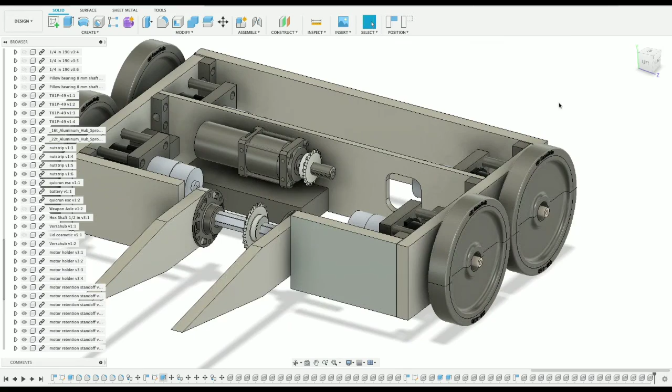But in between this, I'm gonna need to figure out what size sprockets I've ordered, because if I order the wrong size sprockets, that's gonna make me feel like a total idiot and I'm gonna need to make another order. But I should have ordered the right size thing. What else do I need to do?

I'll probably go add this stuff to my Amazon cart. I'm gonna go figure out exactly what I want for the light.

It'd be kind of cool to replace this whole center area with polycarbonate, and then put a ton of LEDs in there, but then I have to put an Arduino in there and program RGB LEDs and stuff, which is really, really fun - don't get me wrong, but that'd be another thing to program and to keep going.